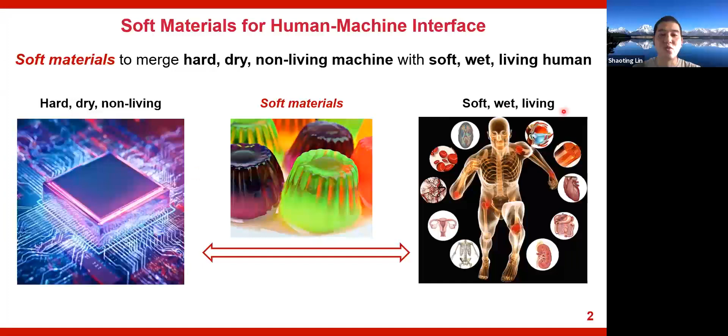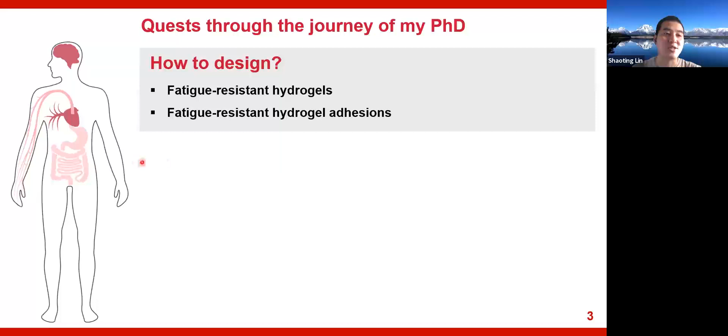There are several key challenges that limit the practical deployment of soft materials. For instance, conventional hydrogels are usually mechanically brittle. The first question is, how can we design high-performing hydrogels that are comparable to biological tissues such as tendon, muscle, and ligament? The second question lies in the difficulty of fabricating large-scale three-dimensional material structures with multi-functionalities.

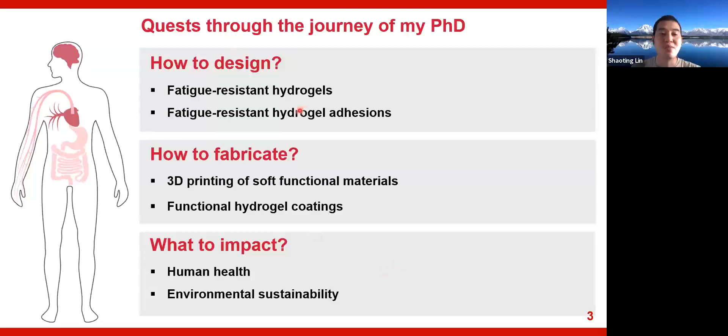Real biological tissues typically have hierarchical and heterogeneous structure across length scales. Can we closely mimic such structure through advanced manufacturing processes? And lastly, what will be the real impacts that are inaccessible by existing conventional technologies? These are basically the three quests through the journey of my PhD work.

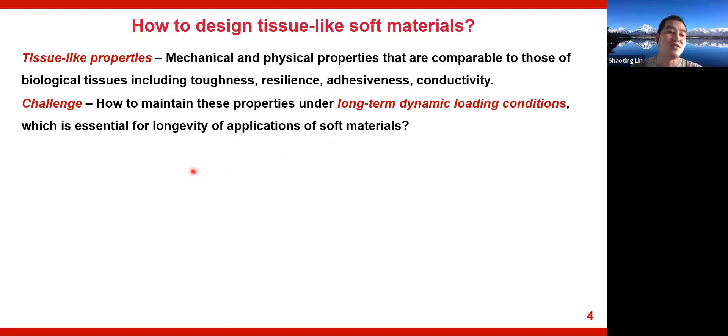One long-lasting interest in the field of soft materials is how to impart synthetic soft materials with combinational tissue-like properties. Specifically, these properties refer to mechanical and physical properties comparable to those of biological tissues, including toughness, resilience, adhesiveness, and electrical or ionic conductivity. It won't be a big surprise to achieve one of these properties for short-term laboratory demonstrations, but the key challenge is how to maintain these properties under long-term dynamic loading conditions, which is essential for longevity of applications of soft materials.

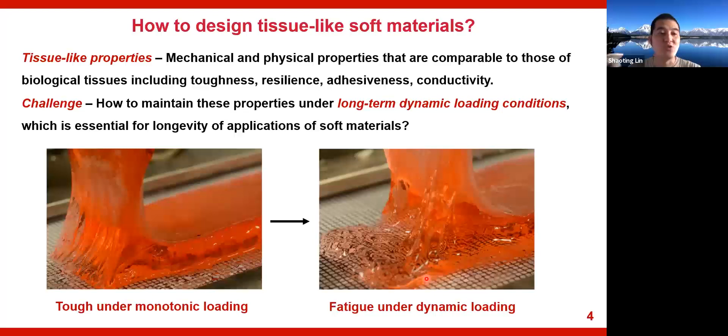Here is one example: people are able to make super tough hydrogel adhesions to diverse engineering solids. Once the hydrogel adherent experiences cyclic peeling loading, it will gradually detach from the substrate over cyclic loading. So the so-called tough hydrogel adhesion suffers the issue of mechanical reliability. In contrast, biological tissues are able to maintain their robustness over millions of cycles per year.

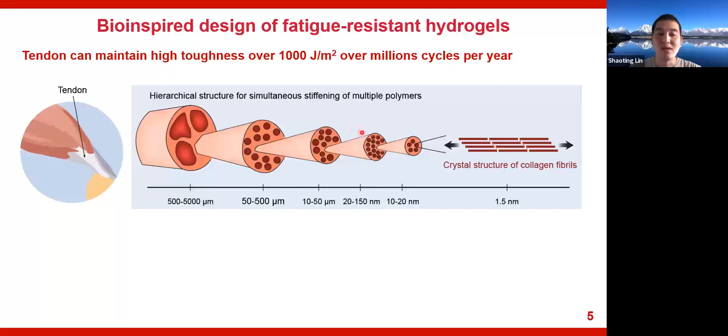For example, tendon is a connective tissue bridging the rigid bone with soft muscle. It can maintain high toughness over 1,000 Joule/m² over millions of cycles. This remarkable fatigue-resistant property is attributed to two physical reasonings: first, the hierarchical structure of aligned fibers across length scales enables simultaneous stiffening of multiple polymers; beyond that, the presence of ordered collagen fibrils is also known to be a key factor.

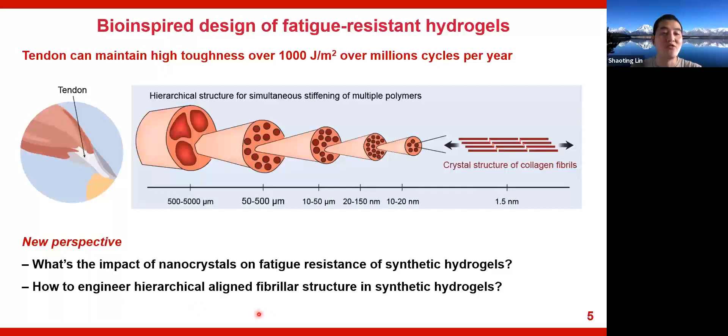Naturally, we are curious about two perspectives: first, what is the impact of nanocrystals on fatigue resistance of synthetic hydrogels? Second, how do we engineer such hierarchical aligned fibrillar structure in synthetic hydrogels?

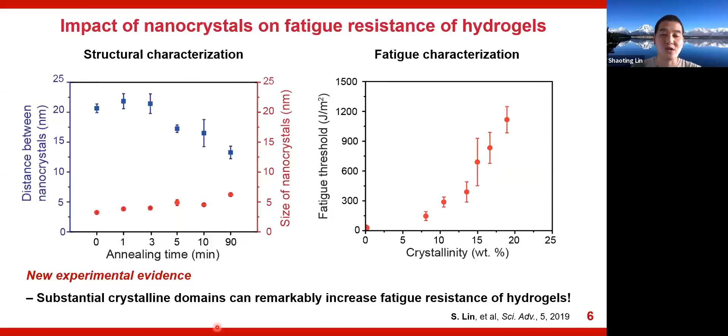To answer the first question, I performed a systematic fatigue study on semi-crystalline hydrogels. I first characterized the average distance between neighboring crystalline domains and the average size of nanocrystals in series samples with controlled growth of nanocrystal domains. Our data shows that substantial crystal domains can remarkably increase the fatigue resistance of hydrogels—the first experimental evidence suggesting the important role of nanocrystals on fatigue properties of synthetic hydrogels.

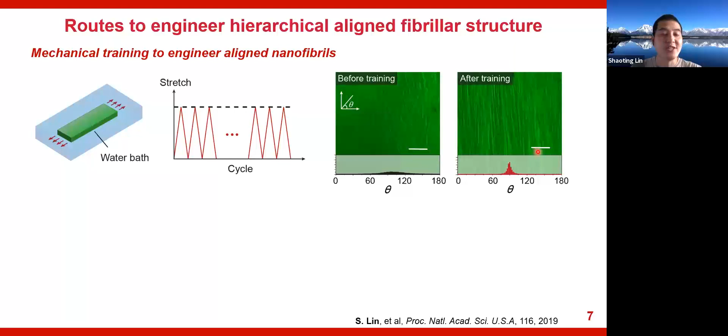The second question is how to engineer hierarchical aligned fibrous structures in synthetic hydrogels. The first technique is mechanical training: after cyclic mechanical training in a water bath, the originally random fibers inside the hydrogel can be trained to align towards the training direction. The water acts like a plasticizer to enable the reforming process of hydrogen bonds, and we find that such aligned fibers or fibrils can effectively pin fatigue crack propagation.

We later further leveraged the power of 3D printing to engineer macro fibers closely mimicking the multi-scale structure design in biologic tissues. So far, we are able to achieve multi-ink, large-scale, high-resolution three-dimensional applications, and depending on the application, you can further incorporate functional components such as living sensors and conductors for bio-inspired modern technologies.

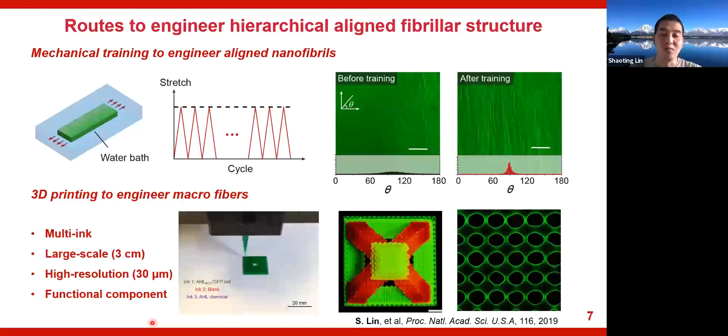Finally, our fatigue-resistant hydrogel successfully demonstrated one practical application as edible hydrogel pills. Here is the working mechanism: the patient first orally takes one hydrogel pill in the size of 1 centimeter.

Once the hydrogel reaches the stomach, it swells rapidly by 60 to 100 times volume and resides in the stomach. Due to its high fatigue resistance, it can not only sustain the long-term mechanical disruption forces generated by the stomach, but also withstand the strong acidic chemical erosive environment.

We further collaborated with bioengineers to demonstrate its capability in a large animal model. The hydrogel pill can safely stay in a pig model for up to 30 days.

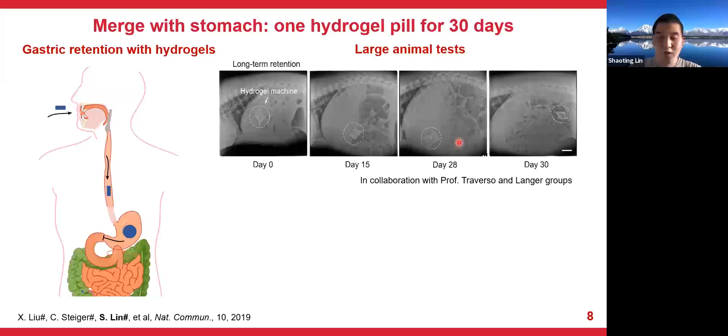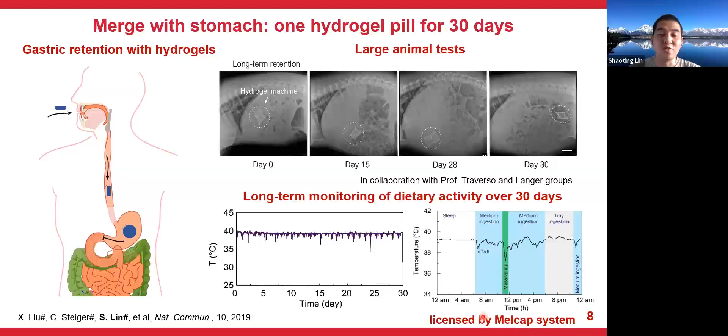We also show its promising potential as a platform for long-term physiological signal monitoring. Here is the temperature profile to monitor dietary activity for 30 days. The patent of this work was recently licensed by a startup company, Melcap System, and they are really eager for a retention unit to host their electronics chips in the stomach.

We are excited to see our material innovation and its practical translation making progress toward our long-term goal of using bio-inspired technologies. On the other hand, these progresses mask one basic fundamental problem: how to quantify or what physically determines the ability of a soft material to resist its fatigue crack propagation.

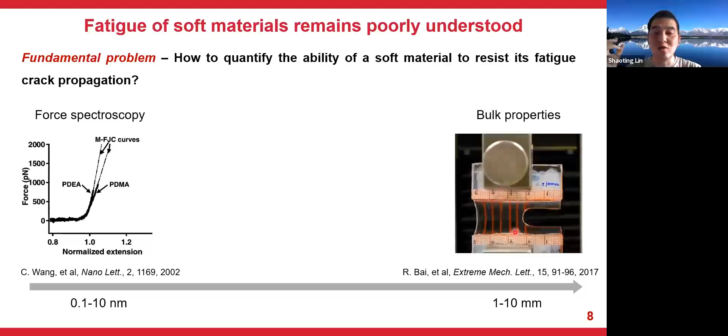Current efforts have been mostly focused on mechanical characterization of bulk samples at macroscopic levels. Ruobing is the pioneer initiating this field, using force spectroscopy to characterize single chain properties at the nanometer scale.

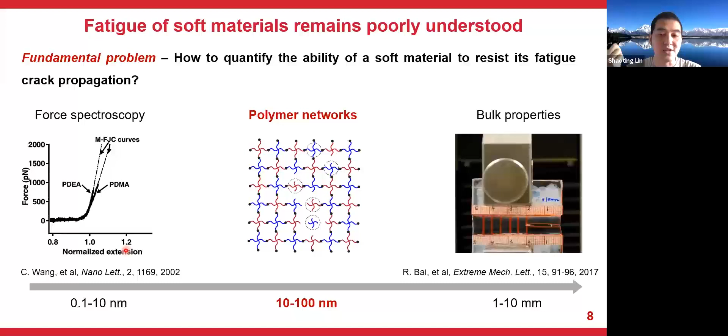My interest is to understand the fatigue of soft materials at the network level through combined experimental and theoretical efforts. One classical understanding on fatigue of soft materials dates back to the Lake-Thomas model, which defines the intrinsic fracture energy, or alternatively fatigue threshold, as a physical quantity to characterize the energy required to initiate crack extension per unit area under fatigue loading. Physically, the value of this energy is equal to the energy required to fracture a single polymer chain times the number of chains per unit area of the crack surface.

The model has been very successful and widely used even nowadays, in the sense that it can be generally applicable to different kinds of polymers, hydrogels, and elastomers.

But recent studies manifest several limitations of this model. First of all, the Lake-Thomas model underestimates the intrinsic fracture energy by a few times, and currently there's no model to theoretically explain this underestimation yet.

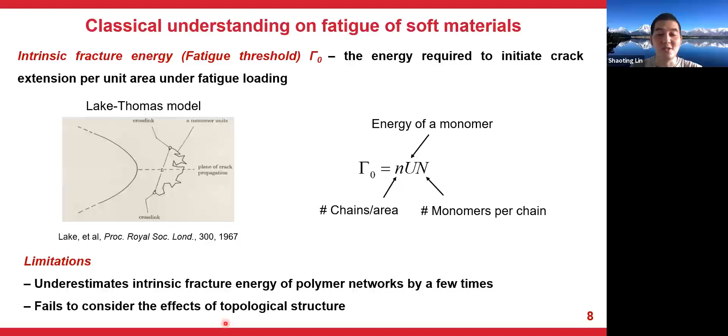Second, the Lake-Thomas model does not consider the effect of topological defects, which are inevitably present in real polymer networks. Real polymer networks contain various topological defects such as cyclic loops, dangling chains, polymer entanglements, chain length heterogeneity, and functionality heterogeneity.

Here, chain length is defined as the number of monomers between neighboring cross-linkers, and functionality is defined as the number of chains connected to one cross-linker.

If one end of the chain becomes inactive, it basically introduces a dangling chain. The number of inactive chains connected to one cross-linker actually defines the order of the dangling chains. For example, we term this one the first order dangling chain, and we term this defect the second order dangling chain.

If all the chains are active, they can still actually present defects in the form of cyclic loops, as we show here. The number of cross-linkers inside the loop determines the order of the cyclic loops. What we schematically illustrate here is basically a secondary loop.

For highly concentrated or interpenetrating networks, the neighboring chains can feel interactions with each other, giving defects in the form of molecular entanglements. Due to the limited time of today's talk, I will be mostly focused on cyclic loops and dangling chains, and we'll leave molecular entanglements and other defects for post-discussion if time allows.

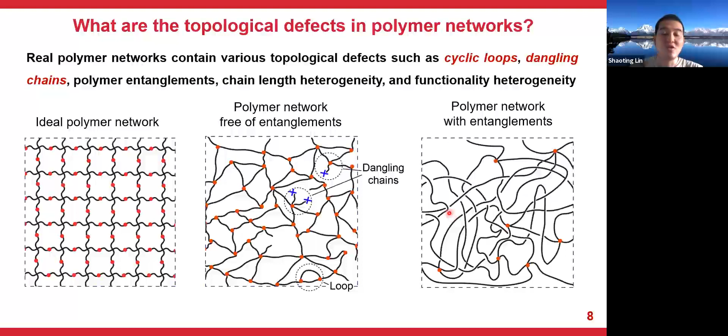Let me start with an ideal polymer network. An ideal polymer network means a polymer network has uniform chain length, uniform functionality, and is free of defects.

Once a crack propagates, it will first relax the energy stored in the fractured polymer chains. For the neighboring chains at adjacent layers, although they are not fractured, their elastic deformation still provides the relaxed energy as an additional energetic contribution to drive the crack propagation.

So here we calculated the energy stored at different layers, and as we show here, the relaxed energy is delocalized across multiple layers. Qualitatively, this is consistent with recent experimental observations based on mechanical chemistry published by Professor Creton.

We further calculate the energy relaxed by all the layers. Here is the expression, which actually eventually gives a finite value with a prefactor of F divided by F minus 2, where F is the functionality of the polymer network.

Here, U chain denotes the pristine value based on the Lake-Thomas prediction. The energy contribution by the neighboring chains can be significant, especially for ideal polymer networks with low functionalities. For example, for a tetra-arm ideal network with functionality of 4, the intrinsic fracture energy predicted by our model is 2 times the Lake-Thomas model's prediction.

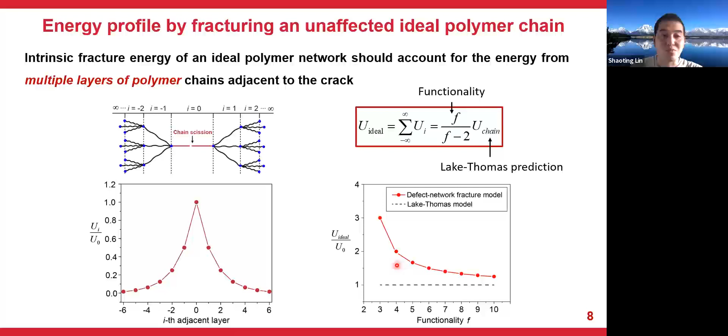We next calculate the energy relaxed by the chain affected by the second loop and affected by first order dangling chain, as two representative examples. Both energies are higher than that of an ideal polymer chain, which indicates the toughening effect due to the presence of defects. Here we introduce a quantity gamma x to quantify the toughening effect due to the presence of defect x.

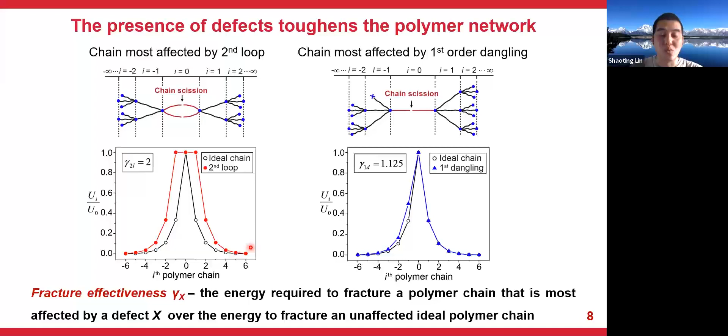The gamma x is a dimensionless parameter greater than or equal to 1. If it is an ideal polymer chain, it's basically just equal to 1. Otherwise, it's greater than 1.

We further quantify the number densities of different types of chains due to the presence of defects. The presence of second order loops does not introduce any inactive chains, but it will introduce affected polymer chains. What's different is for the dangling chains, it will introduce both inactive chains and affected chains.

Here's one example: the presence of one second order loop basically makes the original chain become longer, but does not introduce additional new active chains. In other words, all the arms of this polymer are essentially active in some sense.

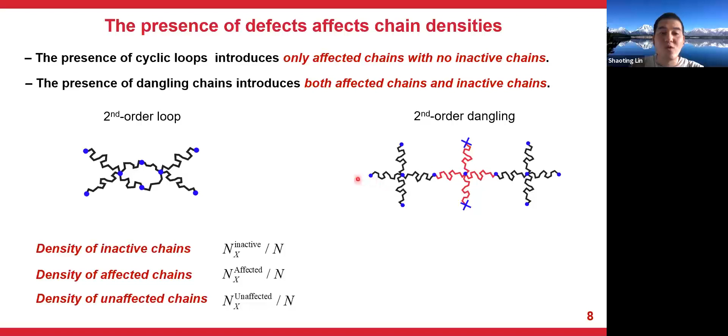Given the number of defects in the system, we generally calculate three types of defects: the density of inactive chains, the density of affected chains, and the density of unaffected ideal chains. The summation of the density of these three types of chains equals 1, a constant value, because of chain number conservation in the system.

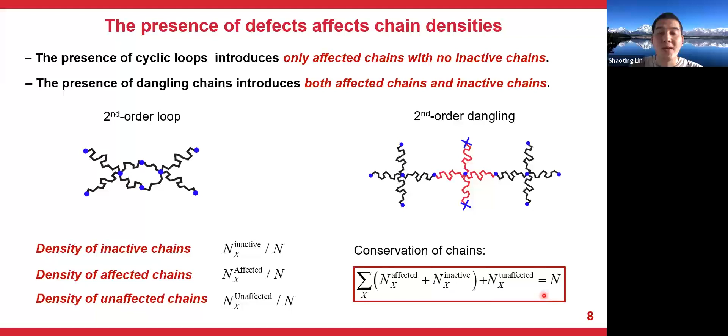So far, we have identified the fracture effectiveness of each type of chain, and we're able to quantify the number densities of different types of polymer chains. With that, we can calculate the intrinsic fracture energy of a polymer network, which is basically a mean value of energy considering the effect from different chains. Here is the general expression: the first term describes the toughening effect due to effectively longer chains, since the fracture effectiveness is always greater than or equal to 1. The second term is always negative, describing the weakening effect due to the presence of inactive chains.

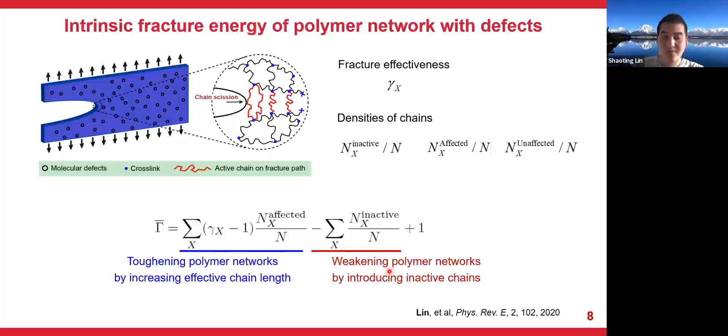Next, we perform experiments to validate this elegant theoretical framework. We specifically select AB type tetra-arm polymer networks for experimental validation. This material system has several advantages: first, it can intrinsically eliminate first order, third order, and other odd order loop defects.

Secondly, we set the polymer concentration at 50 grams per liter, which is below its overlap concentration, so there will be no polymer molecular entanglements in the system. We're trying to make the system as clean as possible at this stage. Third, we check prior simulation results to ensure our polymer concentration is above a threshold value below which cyclic loops can be introduced in the system, so we basically neglect the presence of cyclic loops.

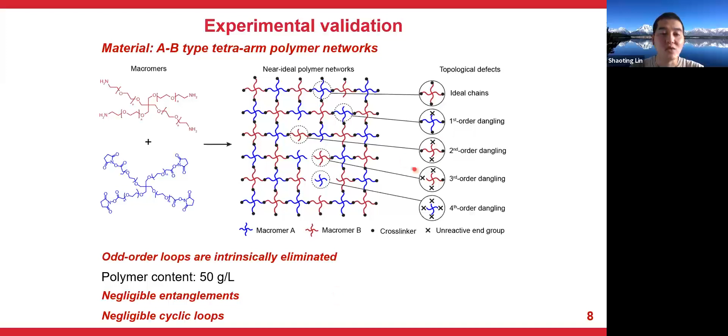The resulting system is a relatively clean material platform containing various orders of dangling chains. We further adjust one material experimental parameter, the hydrolysis time, to allow the NHS ester to degrade over time so that the reaction efficiency of the system can be readily tuned. If you let the system sit for a longer time, the reaction efficiency of the polymers will degrade accordingly. We use the measured shear modulus to calibrate the reaction efficiency.

One additional note we'd like to highlight: we find that the fracture energy and the fatigue threshold of an ideal polymer network are the same. Even after introducing various densities of defects, the fracture energy and fatigue threshold still remain approximately the same. This estimation is also independent of the loading rate.

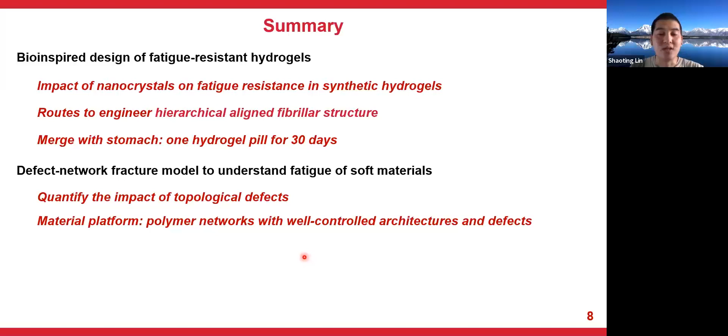We propose a defect network fracture model to quantify the impact of topological defects. From the experimental side, intense efforts have currently mostly focused on randomly cross-linked networks, so here we show the potential of using an ideal network as a material platform with well-controlled architectures and defects.